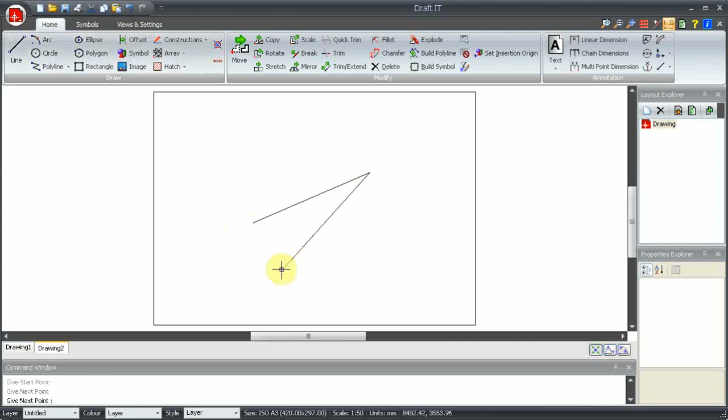In this short video we will look at the three Draft.IT trim commands: quick trim, trim and trim extend. Let's look at quick trim first. OK, quick trim deletes the part of the entity that you click on. Other entities that cross this entity are what we call boundaries.

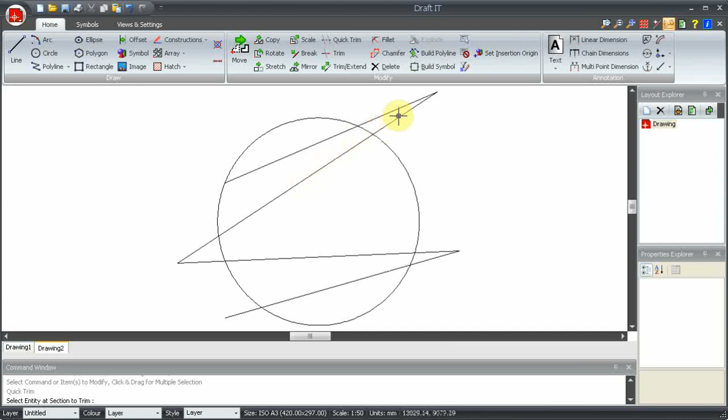So for example, if we click on this line here, then the end is deleted up to the circle, which is the nearest intersection. Whereas if we click on this line here, we lose the middle section.

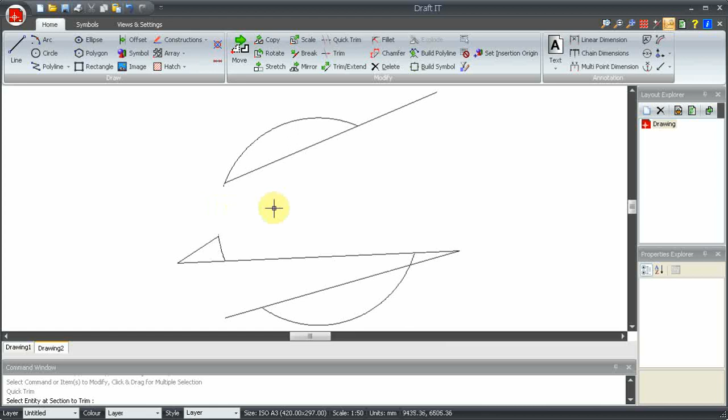It's that simple. Quick trim uses intersections with other geometry as trimming boundaries. Click on the end part to delete the end, or the middle to delete the middle. We'll just get rid of these bits. Now let's draw a few more lines and look at the trim command.

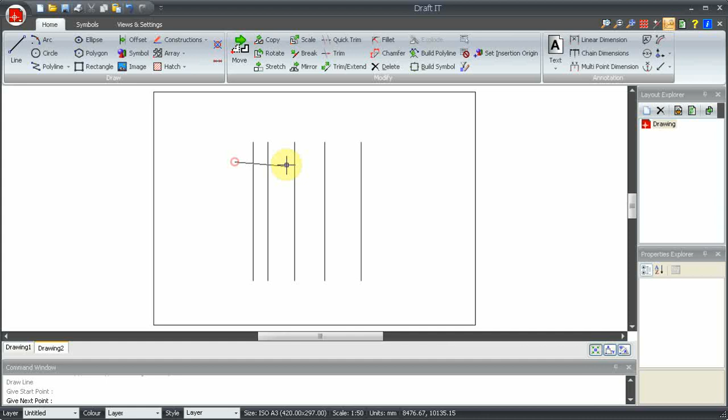We'll start with a vertical line here. Now we can offset that a few times. Let's do the same horizontally. Add a line here and create a few offsets. Now we will draw a rectangle about here, and let's make it a different colour.

The trim command allows us to define any number of entities as boundaries, and then, like the quick trim command, we can delete the ends or midsections of the entities we then pick. So here we pick the 4 lines that make up the rectangle. Now we press enter to end the selection.

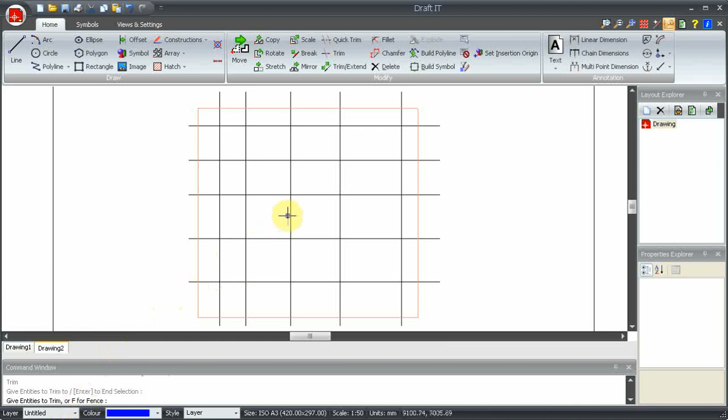So we can pick on single entities to trim them. The difference here, of course, is that we are controlling the trimming boundaries, whereas quick trim just trims to the nearest entity. If we now look at the command prompt, you can see that we have a fence option. To use it, we simply type F.

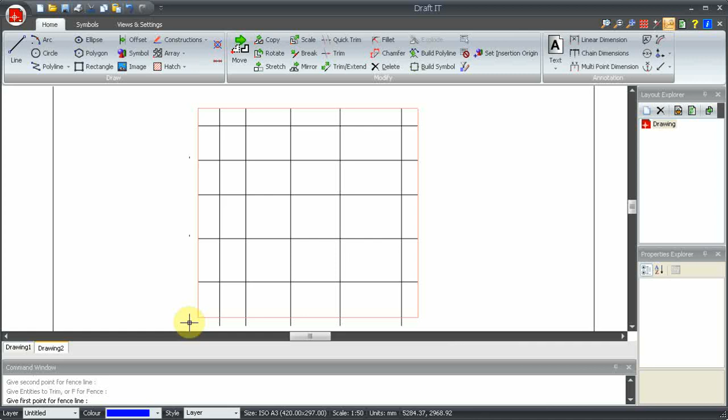Now we click 2 points to define a fence line, and everything that crosses this line is then trimmed to the boundaries, like this. It's very easy. So as you can see, we can quickly trim all of the lines back to our rectangle.

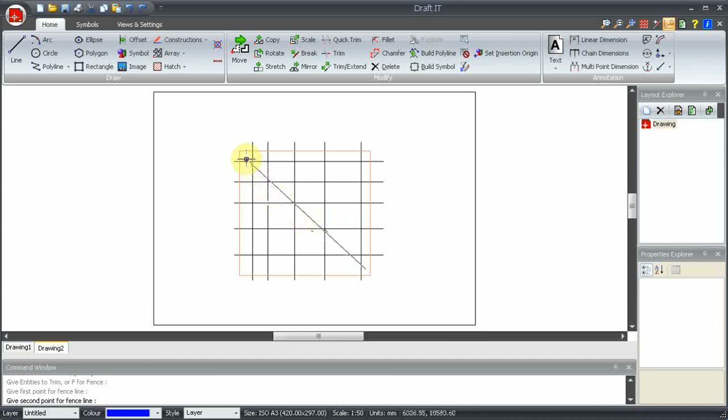Let's undo that and use the same fence method to remove all of the lines inside the rectangle. Again, we select the rectangle as the boundary and type F for fence. Now if we click here and here, the fence intersects all of the lines and completely clears the inside area.

OK, now we'll undo a few steps back and look at the trim extend command. This command allows us to increase or decrease the length of an entity. When you pick the entity, it is the nearest end to the position you select that will be modified.

If we pick, say, this line, you can see as we move the cursor, a dynamic dimension is showing. We can type in directly or use the input box here. When we enter the value, the line length is increased. You can also enter negative sizes to decrease the length of the line.

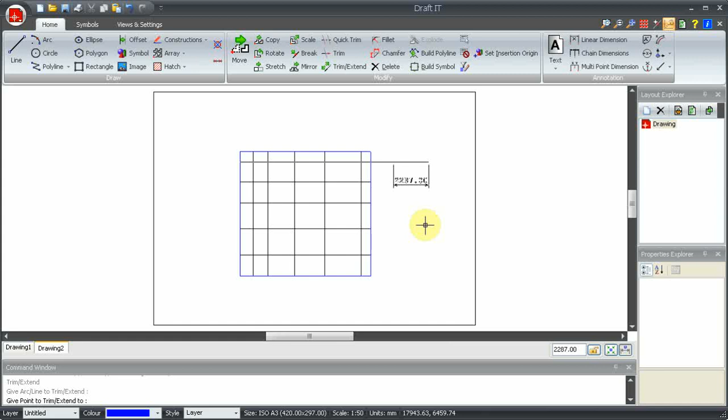If we now repeat this command, you can see that the previous value is remembered. If we don't want this, we can just directly input a new value or press the button here to unlock it. We don't always want to use exact sizes. So if we switch to snap mode, we can use other points on the drawing to change the length, like this. The trim extend command also works with arcs.